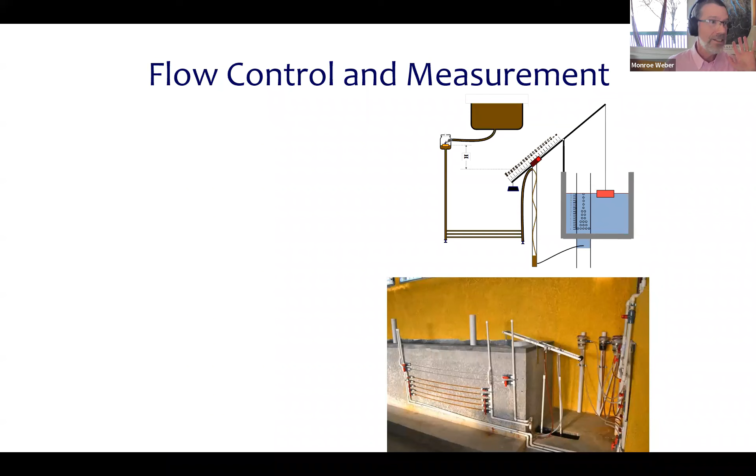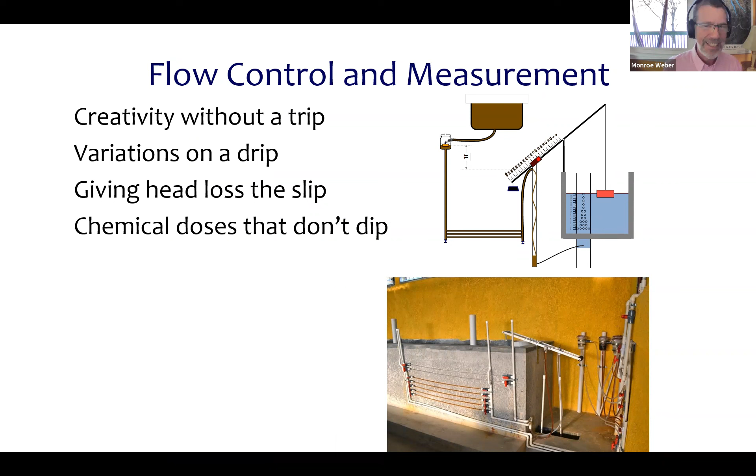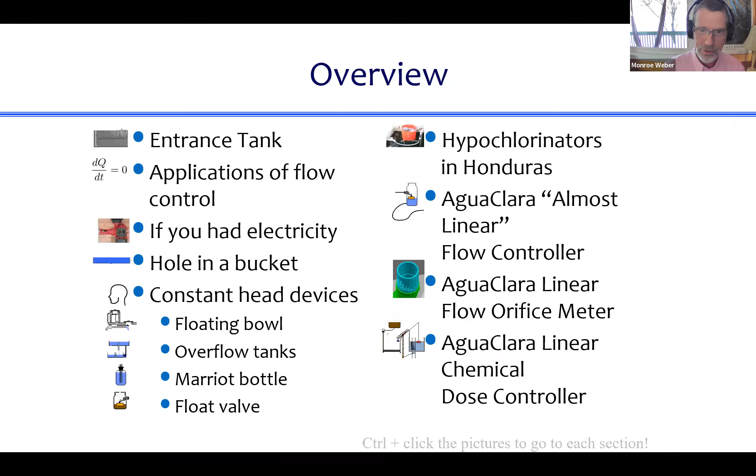So to get started, flow control and measurement, it's creativity without a trip. It's variations on a drip. It's giving head loss the slip, and it's chemical doses that don't dip. So that's what we'll be talking about. And entrance tank got added to this long list of things that we're going to talk about over the next 2 sessions. So, entrance tank.

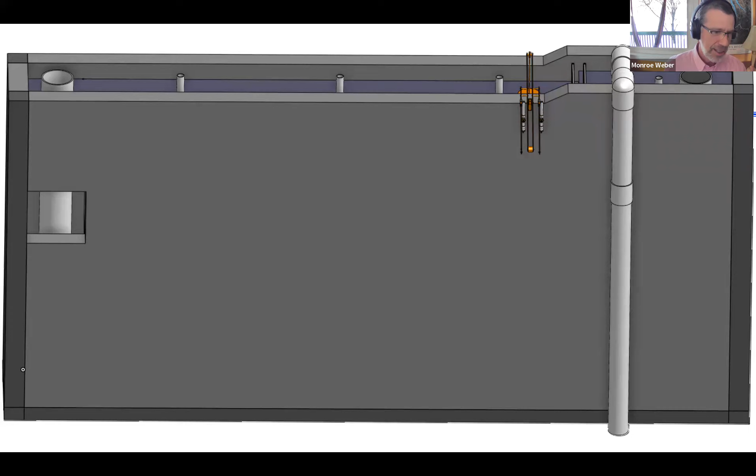So this entrance tank is what I was talking about, hot off the press. I just added the chemical dosing, the doser system to this this morning. Let's look inside, and we're not going to worry about the chemical dosing system until much later, like almost at the end of the next session. Inside are all these pieces, and water enters through this pipe. And I should have made an animation here, but I got distracted.

So water flows down into the entrance tank. I'm assuming you can follow my cursor. It's going to get deflected by this sloped bottom and end up heading over in this direction. And it's basically going to make a big eddy here and circle back and then go through. Here's some trash racks. Here's where the dose controller is for the chemical feed. It's picking off the water level there to figure out what it's doing.

This long section of the entrance tank is about providing an opportunity for pretty high density particles, grit, like think small sand, to settle out so that it doesn't end up clogging our flocculator. So things that would have settled out anyway in the plant, you want to catch them here so they don't settle out and give you a maintenance issue later on in the plant. And the way that the grit is handled is it's going to drop into these hoppers, and if the hopper begins to fill up, the plant operator can grab a hold of this 2-inch diameter PVC pipe and pull it up.

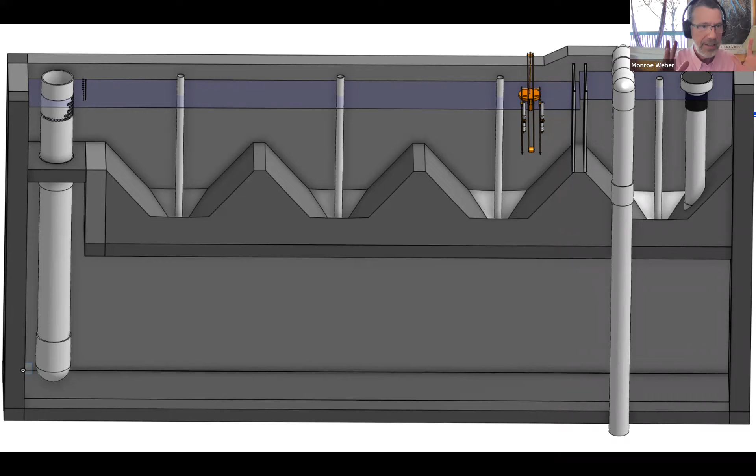And so it's looking down on this tank from above, what's the area that this plant provides for particles to settle out? It kind of makes sense, right? We're relying on gravity, and gravity's pulling things down to the bottom of the tank. And so it's that bottom surface area that matters.

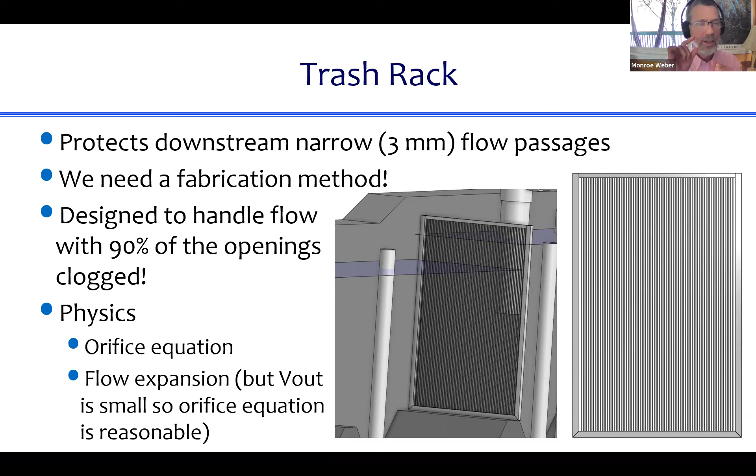Here's the inside of where the trash rack is. And you might be thinking about, why do we need a trash rack? What's so important about that? Our trash rack is maybe even more important in our plant design than in conventional designs, because the very first place where water that goes through our flocculator and then is going into our sedimentation tanks, before there's really been any opportunity for more particle removal, the water is going into the sedimentation tank and it's having to flow through an exit that is about 3 millimeters wide. So there's a gap that the water has to flow through that's only 3 millimeters wide.

And that means that our trash rack has to catch everything that's bigger than 3 millimeters. Otherwise, it's going to land in these diffusers that are in the bottom of our sedimentation tank. They're going to clog and it's going to be a maintenance issue. And here's actually an opportunity for some creativity. In one sense, it's a very simple device. It needs to provide a gap that's smaller than 3 millimeters and catch debris. Think leaves and twigs and fish and crayfish. It needs to catch all of that stuff before it would go further into the plant.

And the various designs that have been built over the years have had problems. We weren't being detailed enough in our designs. We weren't providing a design that looked like this even. It was even less detailed than this. And so our partner in Honduras was trying various things to make a trash rack. And often the porosity, meaning the fraction of the open area, wasn't high enough in the systems that they made. And so the head loss was too high.

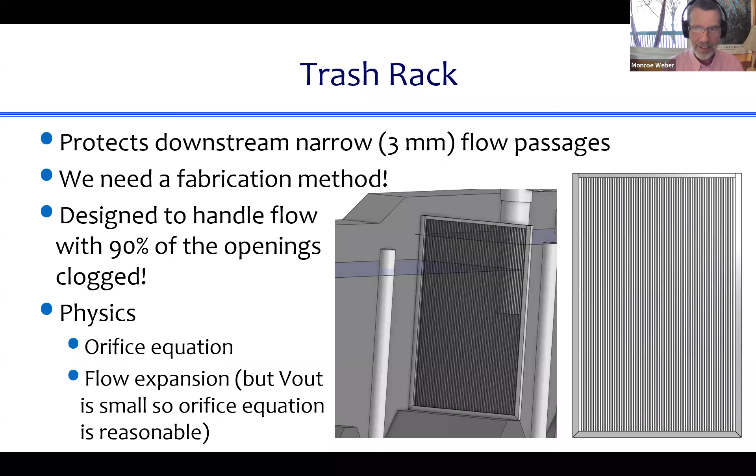So that's the potential place for some creativity, and I haven't thought a whole lot about potential projects for this class, but we'll think about that as we get closer to that time. This might be a potential project. We need a good fabrication method for a trash rack that has a high porosity. You can think of this as like guitar strings that are somehow kept tight. And that somehow kept tight is the part that I don't know how to do. So that could be a potential project to figure out how you would fabricate a simple system that allows you to have wires kept tight that would maintain that 3 millimeter gap. It would be easy to clean. Okay, I'm good with that.

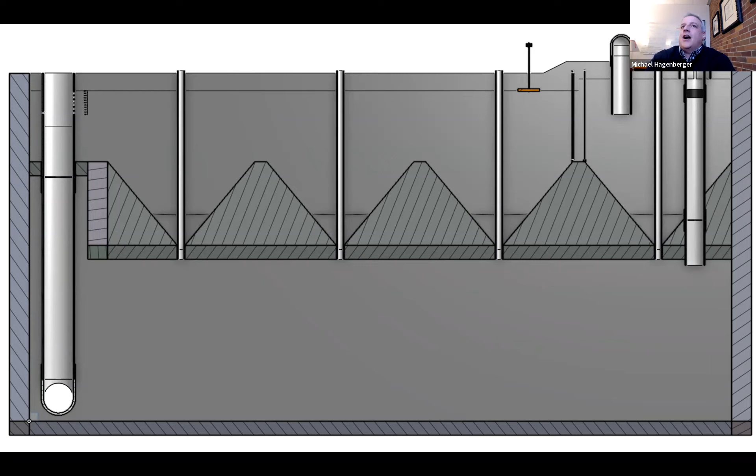And Michael's got a question. I do, Monroe. First of all, very timely, because in your presentation last week, the students in Capstone saw this new entrance tank, which we had never seen before. I'm curious if you could explain a little bit why. I understand the idea of the hopper, but was there anything to the geometry of the hopper, the height of it, the slope of it, that would be of interest to me? That's excellent. Were you looking at my notes beforehand? So I'm not going to answer your question. I'm going to just keep right on going.

This is about design thinking. And Michael asked a perfect question, like, well, where did that height come from? And that's actually a really good question, because if I tell him I looked it up in a book, that's not very helpful to Michael. It doesn't really help explain where that came from. And if I say, oh, it doesn't matter, then Michael knows that I don't understand physics, because it always matters. And that's like a key insight.

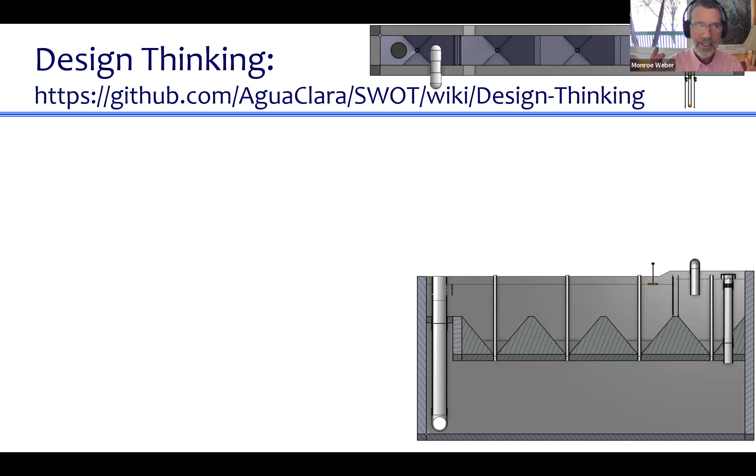When you're designing something, there are no random dimensions. There aren't any dimensions where you can pick anything you want. There's always something that constrains it. So no dimensions are arbitrary. There are always constraints. And this is true whether it's an evolutionary trait like the diameter of your femur, or an engineered device like the diameter of a bicycle wheel. In all cases, there's something, and you shouldn't have to think too hard to figure out what might be constraining each of those.

So what's constraining it? Often it's physics, or for that matter, biology or chemistry. I had a physics minor, and so I tend to think of the world as it's all about physics. I know that the microbiologists would disagree with me, but anyway, so I say it's about physics.

And there's Michael's question, like, well, what about that slope in the hopper? Where did that come from? Well, what would you like to have happen in this hopper? You would like it if, when you pull the plug out of that hopper, the hopper would drain, meaning all the sediment that's sitting there would slide down and go out the hole.

And this is very similar to, are there any places in Ohio where there are cliffs or hillsides where there is, I think it's called scree, where there's like rubble coming off the side of a mountain, and the slope that you get is the angle of repose. It's the slope that's just barely stable. And usually where there's scree, if it's close to a hiking spot, there'll be signs there. Don't hike on this, because the whole thing is just waiting for an avalanche, right? You don't hike on scree.

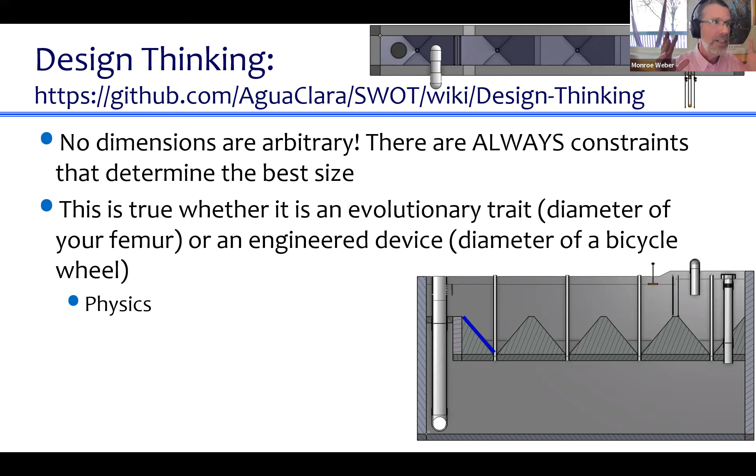Wow, I think I might have answered Michael's question. It is a case where, like, should it have been, I guess I have 1, 2, 3, 4 hoppers there. Should it have been 3? Should it have been 5? Where you'd have to really go into optimization of cost to figure out that one, which is kind of cool because now we could actually do that. Now with our system, we could make the change and see how much the cost changes to see which ends up being the cheapest option. Of course, we're not taking into account labor when we do that, but we can at least get a sense. So that's one thing.

Another constraint besides physics is economics, which I just mentioned about, like, you don't want to use more concrete than necessary. Another one is fabrication. Oh, economics. I think I pulled up the diameter of that overflow pipe, and the diameter of that overflow pipe is partly determined by economics as well, because a bigger one would work even better. So there's two constraints that fight. There's a hydraulic constraint that says it has to be a certain diameter in order to carry the water that might come into this entrance tank, meaning the plant flow rate, and dump it.

If the trash rack completely clogs, that's your worst case scenario, and that overflow better be able to dump all the water coming into the plant so that it's not just spilling out over the floor. So there's a hydraulic constraint, and the hydraulic constraint says that anything bigger than, I'm guessing that's a 4-inch diameter pipe, anything bigger than 4 inches is great. And then your economics constraint comes in and says, okay, but I'm not going to put a 20-inch pipe there because that costs me a lot more money. So economics or resource efficiency is always there.

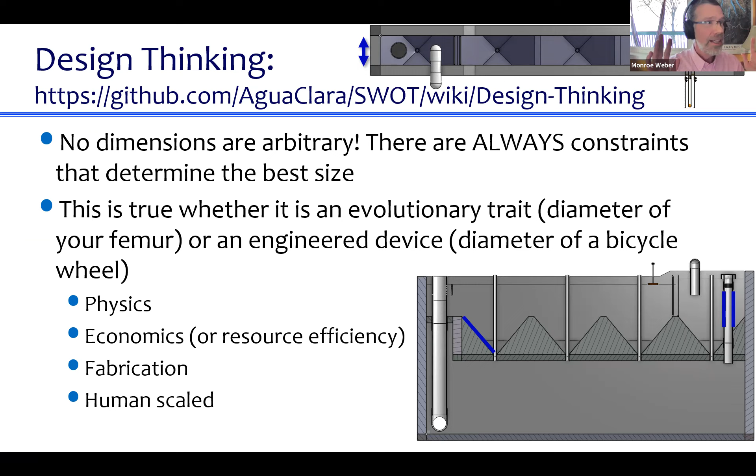And I'm curious, when you're browsing on Onshape, I don't know what you can see. I know what I can see, but I don't know what you can see. I know that almost all of our material is open source. Is there a way that you can actually easily find all of our files? Anyone? Like, can you see entrance tank, flocculator, sed tank? Can you easily see that stuff somewhere? Haven't tried? Try it and let me know how that is. I'm hoping that you can easily find that. And if not, we'll figure out how to make it easier.

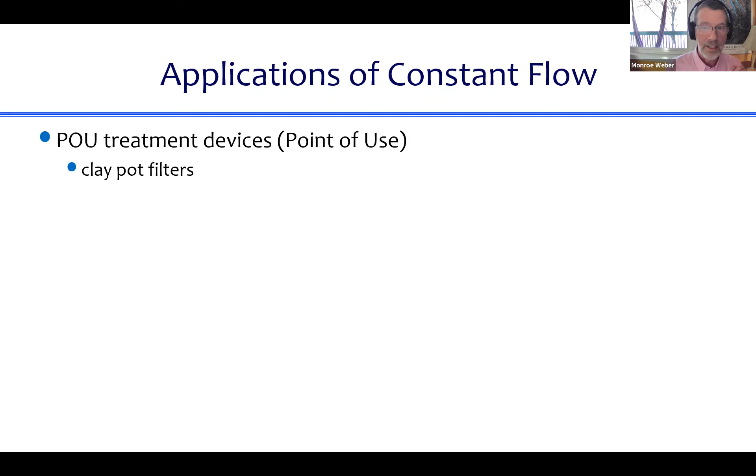Okay, the next thing I want to talk about is applications of flow control. When is flow control important? One example is if you're going to do point of use treatment. So if you're going to treat water in your own home, then you need to figure out some way to control the flow rate through your little treatment device. Otherwise, it's not going to work as well. Examples are clay pot filters, slow sand filters. Maybe you're trying to remove arsenic and fluoride. And I really should have had some images here, but apparently I was too lazy.

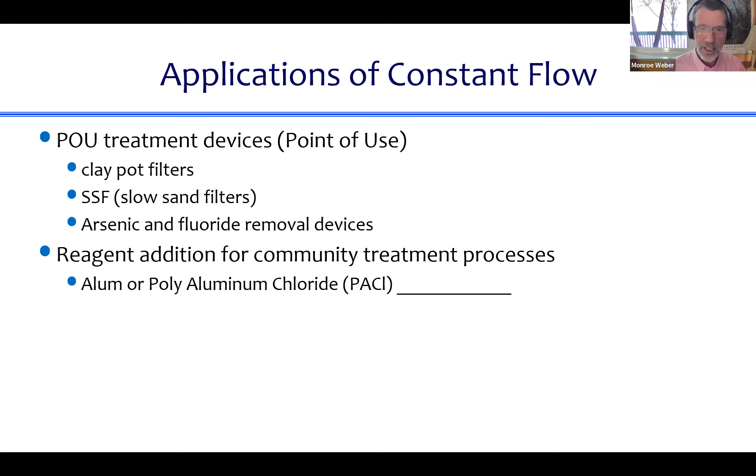When I was in Honduras in the 80s, I was trying desperately to make a slow sand filtration device that would work for my own home. And one of the critical pieces is figuring out how do you get flow control to work nicely. We need to add chemicals for a water treatment plant. So some alum or polyaluminum chloride as a coagulant. And we need to control the dose of those and make it easy for an operator to increase or decrease the dose. So that ends up being critical.

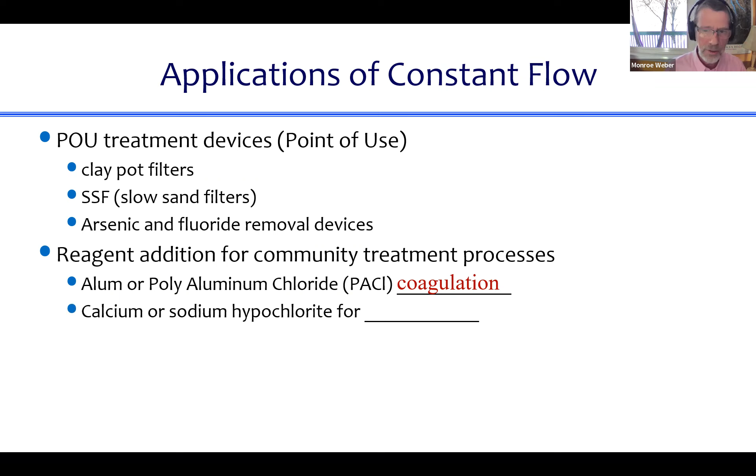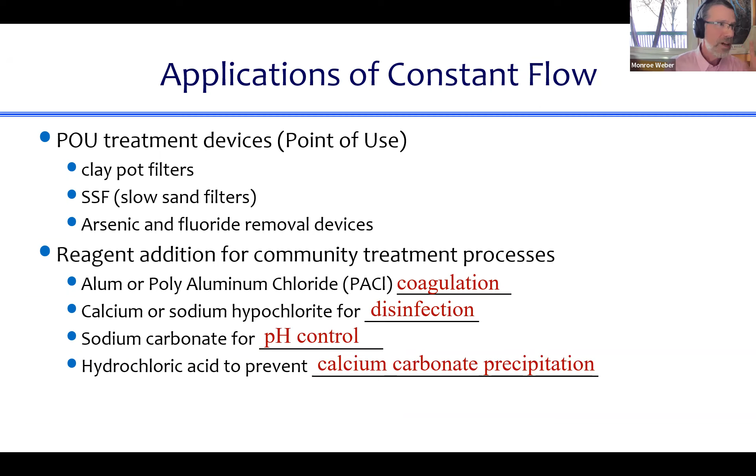Another one is chlorine for disinfection. Maybe you need to add sodium carbonate or hydrochloric acid. Sodium carbonate to control pH, hydrochloric acid to drop the pH a little bit to prevent calcium carbonate precipitation. One of the things that we've done in one of the plants in Honduras, and yes, you need to worry about whether you end up dropping the pH too much and you're causing solubility of lead in the distribution system.

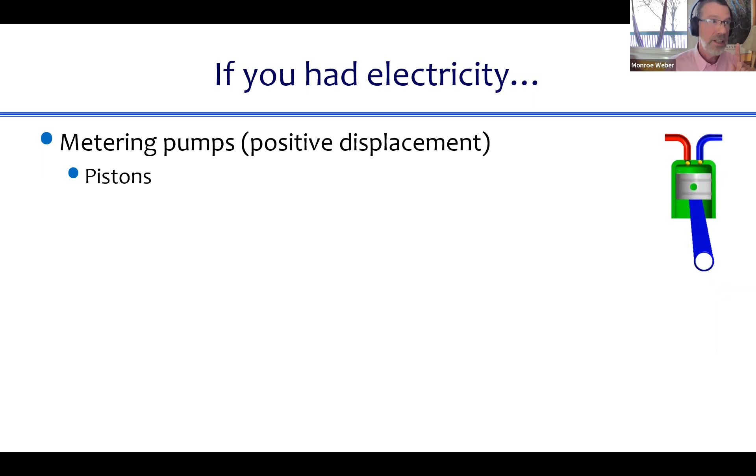So if you have electricity, then this is what you do. You use a metering pump. So here's a piston pump. Piston pumps are great and can be used to meter chemicals. The problem would be that the piston itself, that whole system needs to be compatible with the chemicals that you're using. And so this would not be the way you would want to meter chlorine. You can use a gear pump. Gear pumps are fascinating. Yeah, also lots of sliding surfaces and another issue of making sure that everything is chemical compatible.

There's peristaltic pumps. This is the system that you would have in the AguaClara lab that you're building there at OSU. Peristaltic pumps, the easy way to think about it is if there was a garden hose laying out on the ground and you walked down the garden hose, putting one foot in front of the other, and as you're going, you're squishing the hose, you would push some water out the end of the hose. That's all a peristaltic pump does.

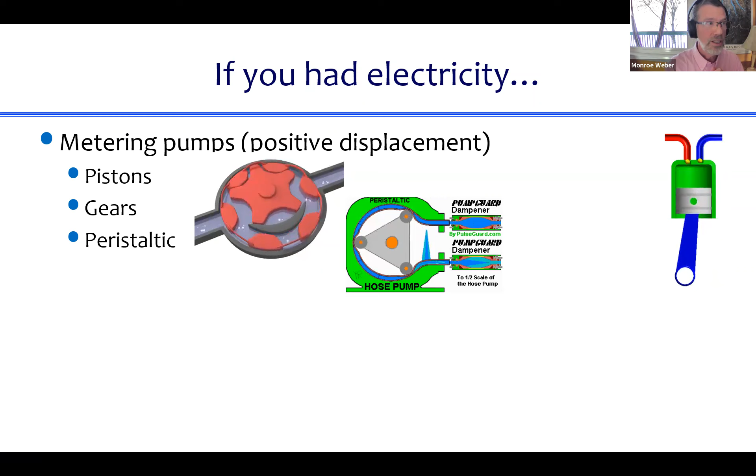And the cool thing about a peristaltic pump is that the only thing that touches the fluid is the hose. So the rollers that are smashing the tubing don't ever touch the chemicals that are inside the tubing. And so you can pump really nasty chemicals with a peristaltic pump.

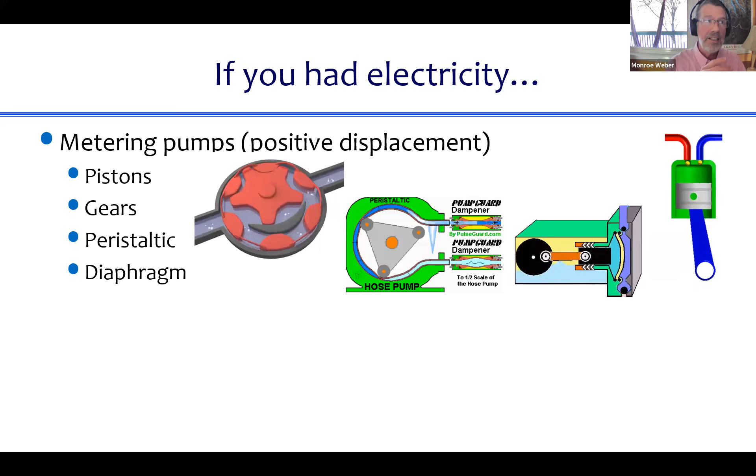Same thing with a diaphragm pump. In some ways, it's a very similar idea. You have some flexible membrane that you're pushing back and forth, and that's acting like a piston, but it's flexible and there are no sliding surfaces, but there's a surface that has to deform.

So some cool ideas. Another completely different idea would be that you would have maybe a stupid pump, like a centrifugal pump, or maybe a gravity powered system that's providing pressure and pushing water towards your water treatment plant. And you could control the flow of that water by having a flow sensor that's measuring head loss and using that to figure out what the flow rate is perhaps.

And then you could have a computer that controls how far open the valve is to control the flow into the plant. That is a very, very common system used in water treatment plants for controlling main flow into the plant or controlling flow into the filters.

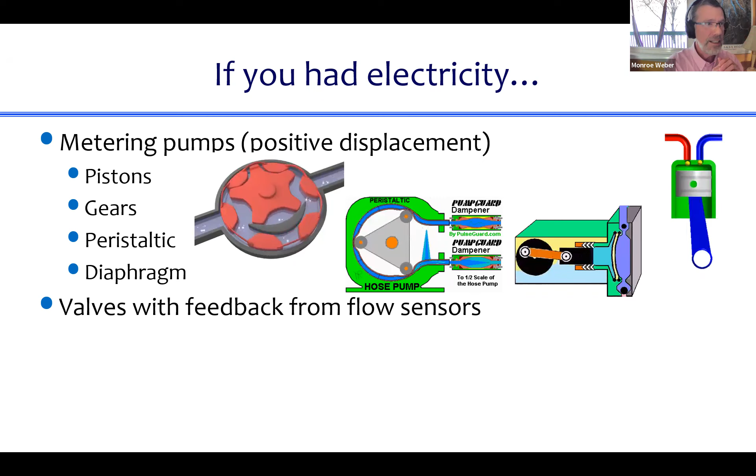And what I am learning about that system is that very, very frequently those systems have problems with cycling, where they have lousy control on the software side. And so it ends up cycling and you end up not getting the nice consistent flow of water through your plant that you would like.

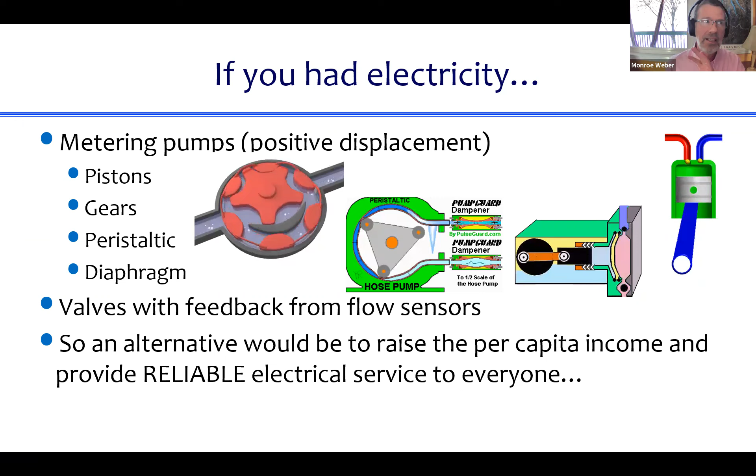But it's an option. And so my conclusion here is one option is to just raise the per capita income of everybody on the planet, make everybody have access to electricity and easy access to all these parts. And then all this stuff works great. And indeed, that's true. If you're in a community here in the US, they can afford to replace their pumps every few years and that whole system works.

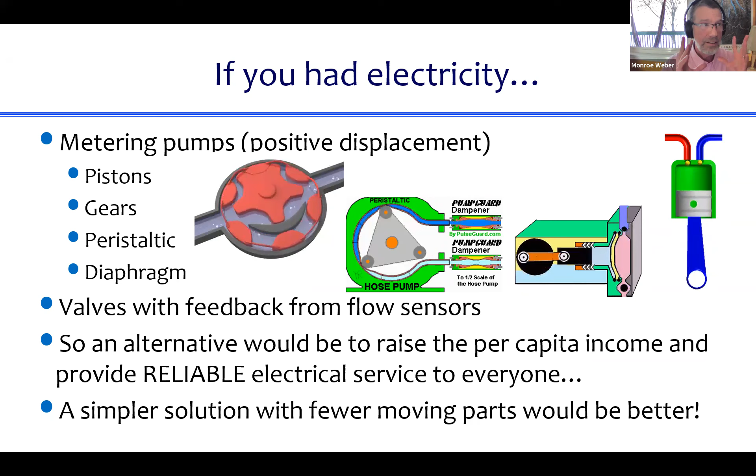And I would argue that there's another approach. And the other approach is going down a completely different path of this evolutionary chain that we're on, where instead of using pumps, we figure out a system that doesn't have any moving parts, but that still uses good physics to make it work well. I'm going to talk about those observations.

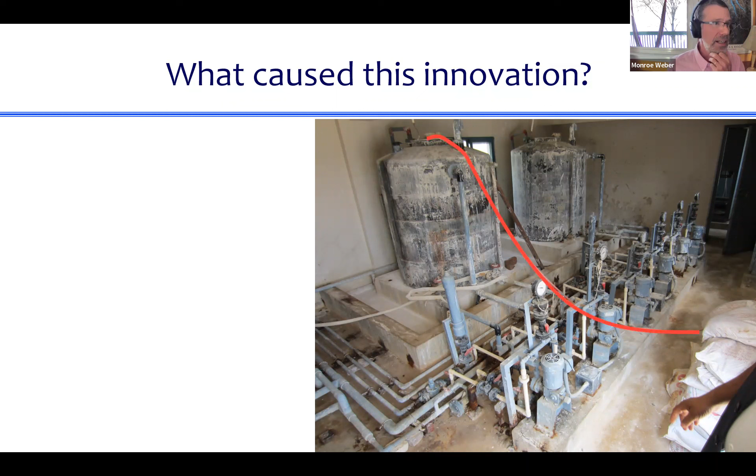So I know that some of you were in the presentation I gave last fall, and I talked about this case of a plant where all the pumps were no longer working and the operators were bright, and they just used a garden hose and they put a kink in the end of that garden hose so that they could control how much flow was going through it. And that's how they set the coagulant dose for the plant. I think it's pretty cool.

So I wonder, if we think about what was good and what was bad about that design. So on the good side, it's simple. All you have is a garden hose with a kink in it. So it's exceedingly simple. It's low cost. It's a part that they can buy at the local hardware store, and there are no moving parts. That's actually a super elegant design so far.

What are the cons? You're imagining there's this kink, and the way they were adjusting that kink, like how hard the hose is doubled over, and hence how big the orifice is that the coagulant is flowing through in the kinked part of the hose: they were wrapping string around the doubled part of the hose and adjusting how tightly they had that string to adjust how much flow they would get through the hose.

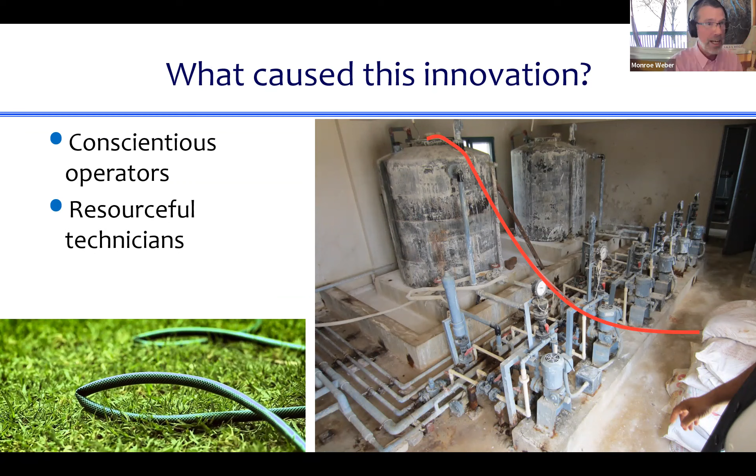So the con is that setting the dose is kind of a mess, right? You can unwrap your string and open up the kink a little bit and then rewrap it to hold it there. But adjusting the dose is not intuitive. You can't easily see what's going on. It's probably not even very repeatable.

And then there's another problem. The flow rate is going to slowly decrease over time as the chemical level in that big black tank goes down. And that's because that chemical level ends up being the driving head that's pushing the chlorine through that kink. So as there's less elevation in that storage tank, less chemical comes out. And then the last one is actually pretty important, and that is, this is based on a siphon.

I have a question. How many of you have at one time in your life or another used a siphon at any scale to get a fluid out of a tank and into somewhere else? Who's used a siphon at least once in their life?

Okay, so there's like 75% of you who have never used a siphon. I would recommend that the very first thing you do today is you go buy a packet of those straws that have the bendable end, and you make a siphon and empty your glass of water with it. If you've never done that, you have to do that at least once in your life.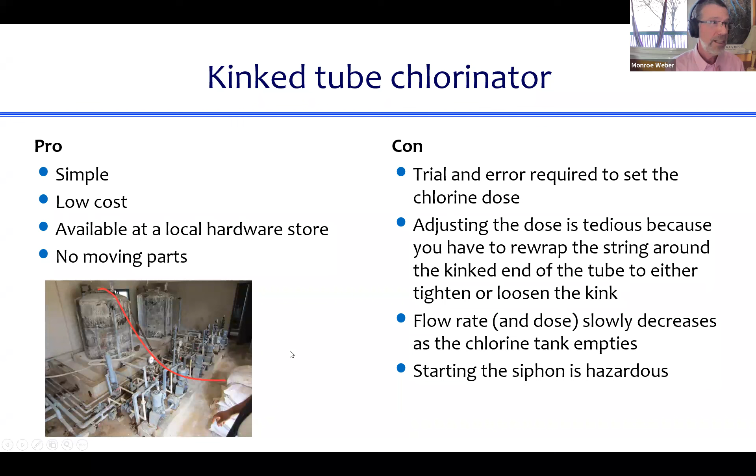Wow, I didn't really intend to help you into a life of crime. But learning how to siphon a fluid is a useful thing. So do that. And my point here is that starting a siphon with chlorine is hazardous, because the last thing you want is a mouthful of Clorox because you sucked a little bit too long.

Yeah, and another example of dosing. I'm showing these because when we began this journey of wanting to design water treatment plants, I recognized that figuring out how you dose the chemicals was top priority, because if you don't have that working, none of the rest of the plant works. And so that became the very first task that we worked on, starting in like 2004. We started hitting this question about how can you make a good system for dosing chemicals?

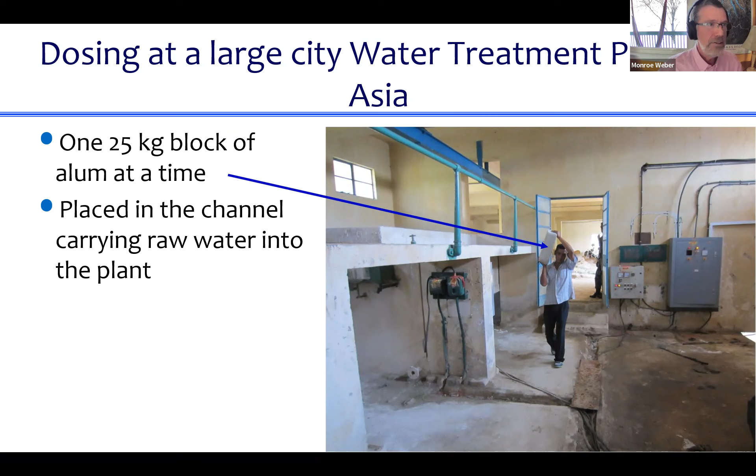And what's fascinating is, that was in 2004. People have been doing water treatment for a very long time, and yet there weren't great examples of how you dose chemicals if you don't have access to electricity and pumps.

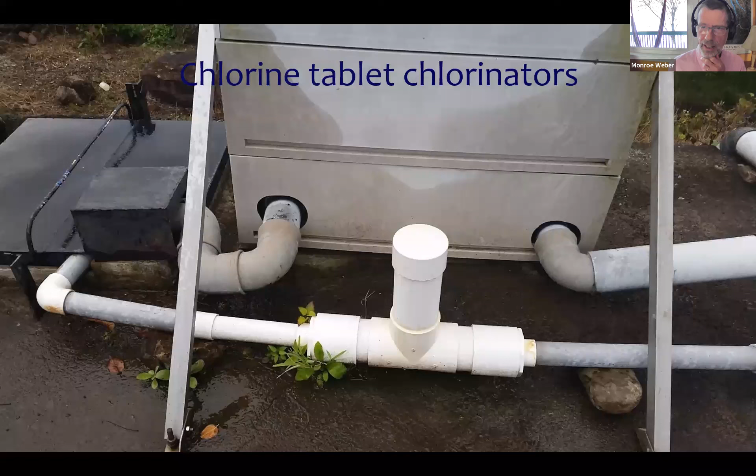So on the back side of this was another chlorine feed system. The cap of that T is meant to be removable, although I tried and couldn't. And what you do is you drop a chlorine tablet. So it's like a hockey puck of chlorine that you would drop in that T, and you might drop several of them in there. And then some of the water is flowing past that T and dissolving that chlorine tablet over time.

And if you get the flow rates right, because you don't send all the flow past the hockey puck, you only send some of the flow that's going into your storage tank past the hockey puck, you can kind of regulate the dose. I'm still waiting to see, someone must have done studies on these to figure out how good they are. This is an option. You can buy this in the US. They're being installed many places on the planet.

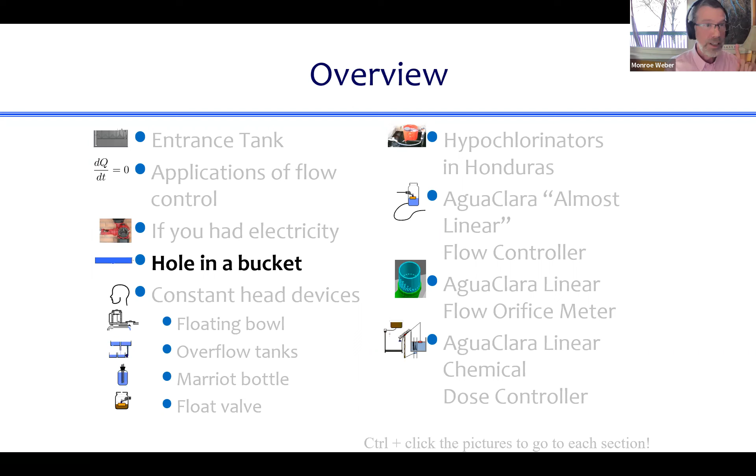I've always been skeptical about how good the chlorine dose is as a function of time, but maybe it's not bad because they're being used many places. But what's interesting here is I'm pretty sure that system wasn't being used either. So there was plan A, not in use, the one that required electricity. Plan B, also, as far as I could tell, they weren't adding any chlorine. And this is a place where an AguaClara plant went in as plan C, I guess, or Roman numeral 3.

You've got a tank of chlorine that's on top of the tank. That's going to be your storage tank for water. Water's coming into your storage tank, running by gravity day and night, and you're dripping chlorine in from this little storage tank. So what happens to the chlorine flow rate over time? So what happens over time? The chlorine level drops in that tank.

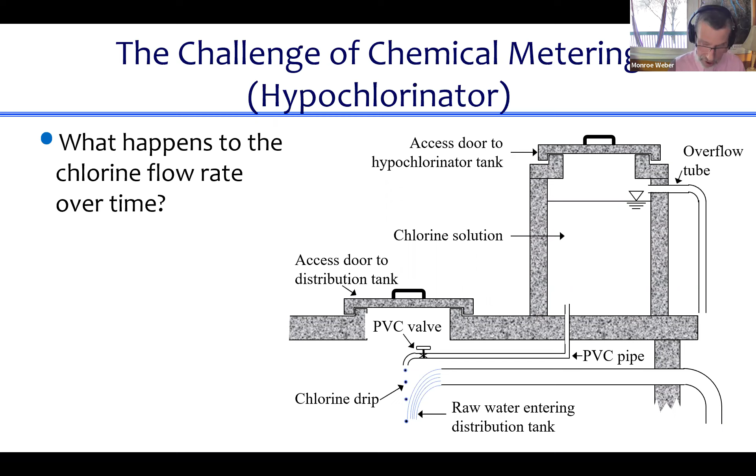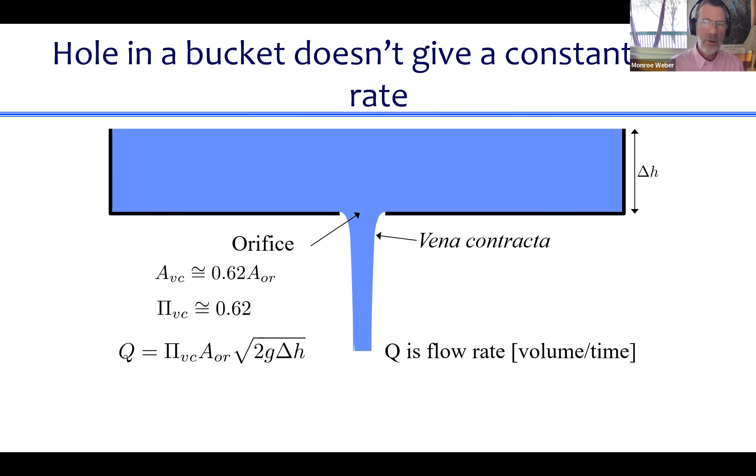And so as the chlorine solution is used, the dose of chlorine changes. And that's not at all what we wanted. We wanted a system that would give a constant chlorine dose all the time. And so this isn't working. But what's interesting is that, well, I'll come back to that in a second. This is why it doesn't work, because of the orifice equation that says that the flow is proportional to the square root of that delta H.

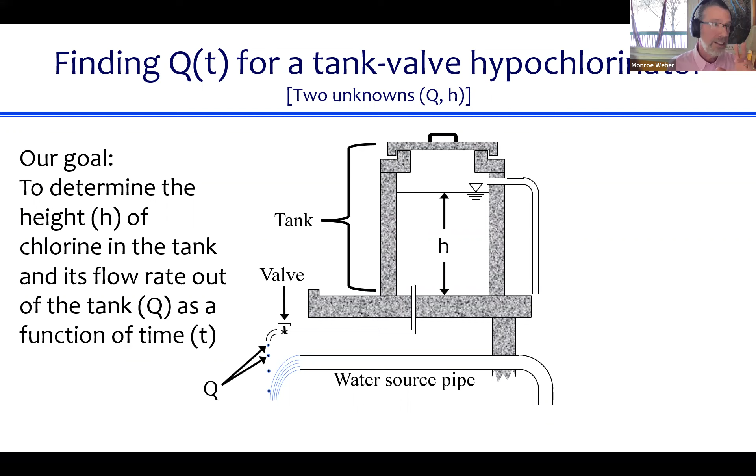So we're going to find out what does the flow actually do as a function of time? And the derivation for this is in the textbook. The derivation involves integration. It's not that complicated, but the result is what's really cool, and it's what I'll show here. This is a result of taking into account the orifice equation, or another head loss, like the minor loss coefficient equation, and tracking volume in the tank as a function of time, and having an equation that relates the height of the chemical in the tank and the volume of chlorine in the tank.

So this is the beautiful equation that we get, that the flow rate at any time divided by Q0, the initial flow rate, is equal to 1. And if we stopped right there, we'd be really happy, right? If Q over Q0 would equal 1, that would mean that the flow at any time is equal to Q0.

But there's this second term in the equation, 1/2 times T over T design times H tank over H0. And that's what's going to get us, because as T gets larger and larger, that second term gets bigger and bigger, and my Q decreases, gets smaller and smaller. And so what's getting us?

Well, as T increases, T design is the time it would take to drain the tank if the flow was held constant. So you filled up this tank, you set an initial flow rate, and you said, okay, at that flow rate, this is going to last 4 days. So that's T design. And when you come back at T equals 4 days, and if H tank was equal to H0, you would find out that the flow was exactly half of what you had expected it to be.

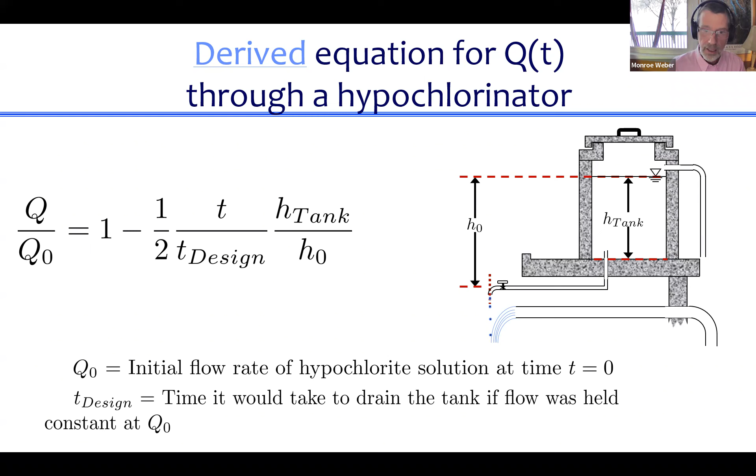So some reflections on this. If we let the discharge to atmosphere be located at the elevation of the bottom of the tank, so if H0 is equal to H tank, then the flow rate goes to 0 exactly when T equals 2 times T design. When T equals 2 T design, then this second term is equal to 1, and that means that Q goes to 0. So that's how long it takes for the tank to drain. It takes twice as long as what you had initially expected based on the initial flow rate. So this is a nice result.

What's the average flow rate during this process if the tank is drained completely? So if it takes twice as long to drain as what you would have initially guessed, it's because the flow rate on average is half of what you had expected. So the average flow rate out of the system is half of the initial flow rate.

So if you take a tank like your bathtub and you fill it up and then you drain it, if you would measure the initial flow rate out of the bathtub when the bathtub is full, and if you would use that to predict how long it would take for your bathtub to empty, you would come up with a time that is exactly 1/2 the time that it's going to actually take to empty the bathtub. Okay? Kind of a cool, simple result. The average flow rate is half of the initial.

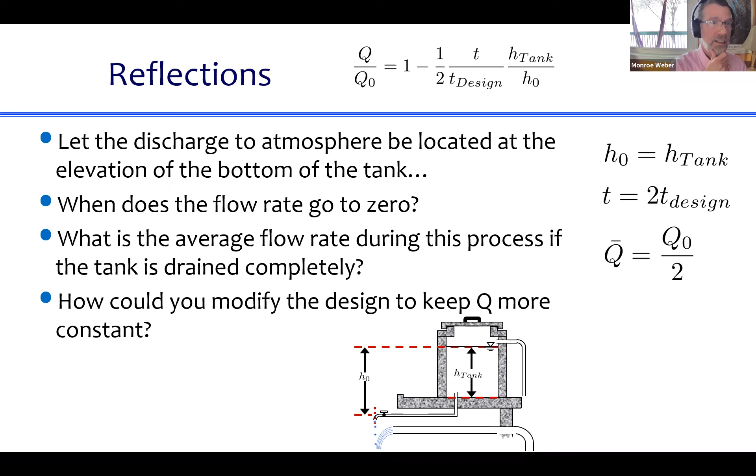Now, do you have a picture of this in your head? What does this look like? This is why we need Onshape. We need to just draw this right away. What does it look like if H0 is 50 and H tank is 1? What do you have? You've got a tank on stilts. It's 50 meters up in the air and it works great. But just like the other solution that Michael suggested, the operator doesn't like it. Do you know why? The operator does not like climbing 50 meters up in the air and mixing up a chlorine solution, right? So it works, the equations work, but it is not an elegant solution.

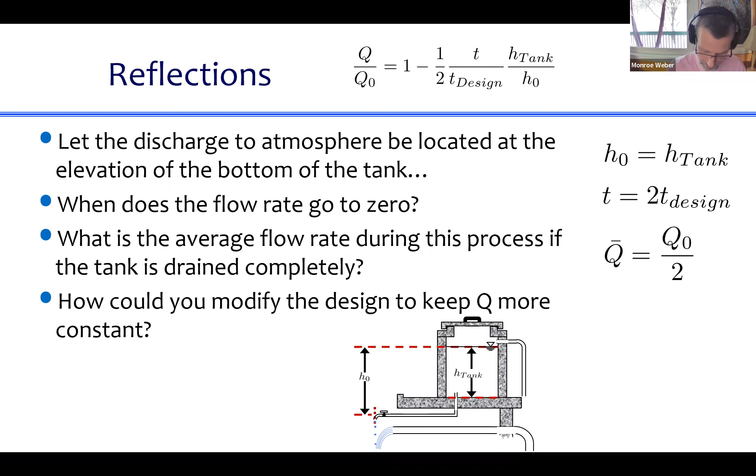And indeed, we've demonstrated that there's a problem here. You can kind of solve it, but in order to solve it well, you end up with ridiculous solutions. And so this is not a great option.